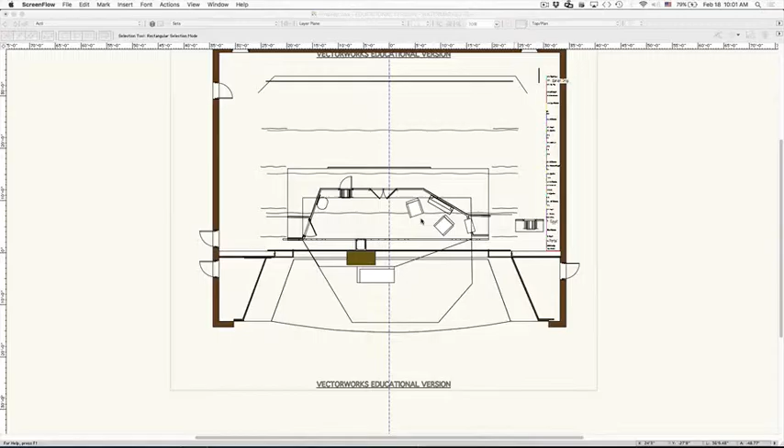Okay, today in Vectorworks, we are looking at lighting positions, object info, and some printing stuff that you'll need to know to do Vectorworks assignment 2. So here is our Mystery of Irma Vep set. This is the Act 1 set, if you remember from last time. We have our navigation palette, and you can see Act 1, we can see Act 2, remembering that Act 1 and 3 are basically the same, so there's not a second thing.

The other thing to remember is that when we're drawing in Vectorworks, we draw on wherever the check mark is. So I'm going to go ahead and actually activate Act 1, because we're going to start looking at lighting positions. Oh, you're in wireframe. You just go up to here, go to top plan, or I think Control 5 on a PC or Command 5 on a Mac. Okay.

And we need to look at lighting positions. On the file you have, lighting positions are called electrics, because that's what I named them. I didn't name them lighting positions. I named them the electrics because I was the scenic designer. Okay. So you go, where are the electrics? Well, we can come down here under class names and go, oh, look, here's electrics. And they're turned off. Let's turn them on so we can see where they are.

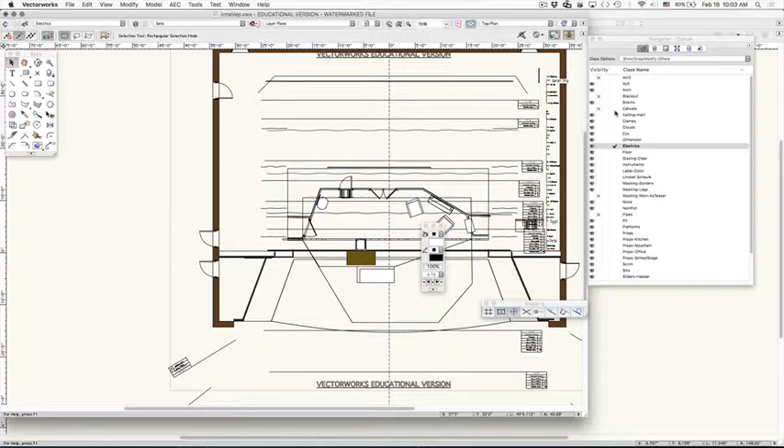Okay. I'm actually going to go ahead and move my check mark to here. And to make this a little easier as you're looking at things, at the moment, I'm going to set this to gray others, which means everything but my electrics are going to be in gray. You don't have to do that. I'm doing that for the video so it's a little easier to see things, okay? And this looks like they have instruments on them. Oh, I know what's going on. I'll show you that. Okay.

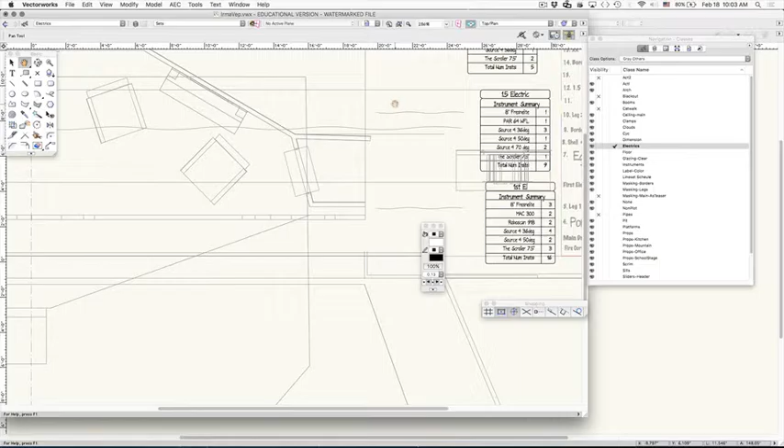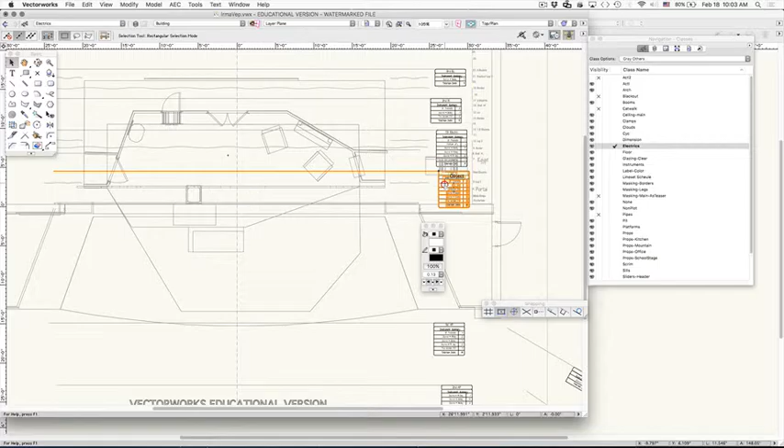So we're going to try to find out about an electric. I'm going to select an electric, okay? Oh, electrics are on the building layer, so you'll have to also move to the building layer to select an electric. There we go. Okay, I've selected this electric. We'll zoom in on here, it says it's the first electric. Okay, I want to find out about this electric. I want to get some information.

To do that, we're going to use the Object Info palette, which we find by going to Window, Palettes, and Object Info. I'm much better with a mouse than my finger. Okay, here we go. And there are three things. There's render, which is how it's being drawn, data, which gives us some information about it, or shape. Shape is actually where we're going to get most of our information at the moment. Okay, so let's look at this. I've selected the first electric, and we can look at this here.

So it is a lighting position object. What that means is I can hang a light on it. That's what you can do with a lighting position object in Vectorworks. You can hang lights on them. The class is electrics. In case I wanted this on a different class for some reason, I could move it by using the drop-down menu here. You can do this with anything. If something's on the wrong class, you can just change it here. Same thing with the layer. I could move that to the scenery layer, the lighting layer, whatever. I'm going to leave it on the building layer for now. But you can move it if you need to.

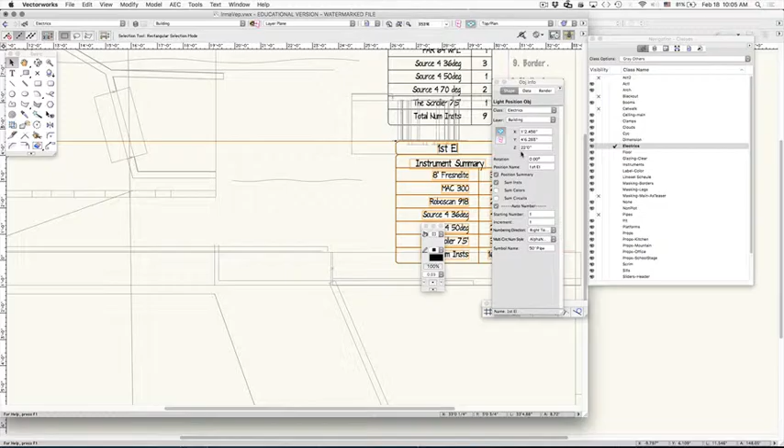Okay. Next up, we have X, Y, Z. X, Y, and Z are coordinate points in space, okay? The one we're going to be most concerned with on our lighting positions is the Z. Z is the height from the stage floor, okay? So our first electric is 22 feet from the stage floor. Does that mean your first electric on your show has to be 22 feet from the stage floor? No, you can set it as the lighting designer in consultation with the scenic designer, and I'm going to be pretty flexible with you.

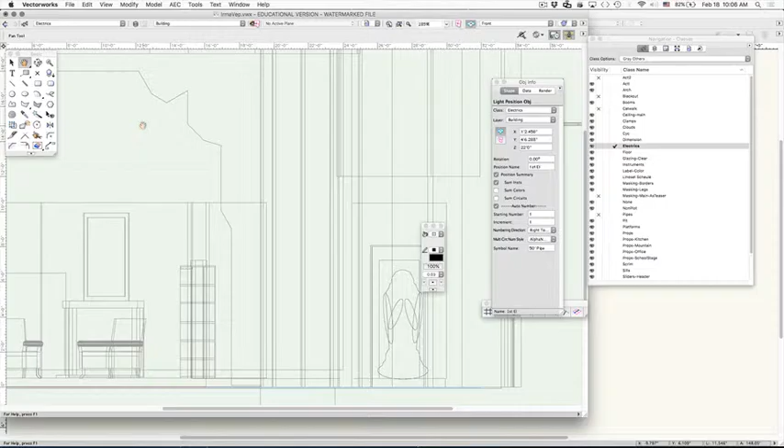Now, I'm going to move into front view for a moment here. Okay. Did you guys see how I did that? There's a little drop down here with your views. The other place you can get that is View, Standard Views, and Front. Okay. And where is my first electric? Okay, I'm going to go into a 3D view. First electric, where are you?

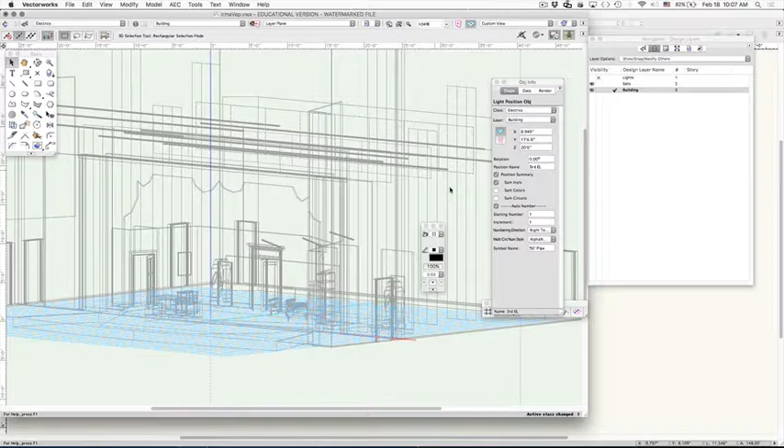Oh, in 12 I can't select an electric in this view. Can I force select it? No. In later versions of Vectorworks, post 2012, you can select an electric in 3D view. Fine. We'll go back to this. And now I've got it selected.

Okay. So it's at 22 feet now. I'm going to go ahead and reset my Z value to 12 feet. So you can see what has happened. We're now going to go back into our front view. And now can you see I now have an electric way down here? Yes. Okay. Oh, and now that it's selected, it looks like I can change it back. Yes. Okay, I can change it back.

Again, you set what your electrics are at. That's your call. Okay? Within reason. A 12-foot electric's probably going to be a little weird because that's going to be in the actors' faces. Okay? But fine. So that's how you can change them. The other thing you can do is, in everything after 2012, you can grab them and move them.

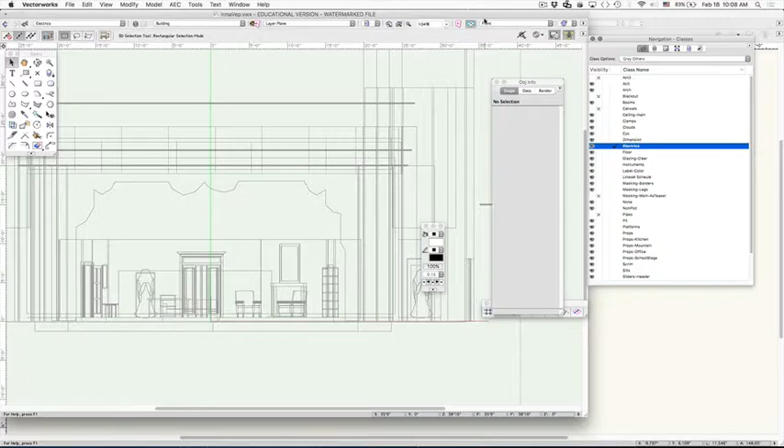No. You weren't able to? Okay. Really? I just tried it because I clicked it to like 1 foot, and I tried to click on it to move it, and it unselected. Okay. So you may have to do electrics. A lot of other things you can move, but it's actually fine, I think, that you can't just randomly grab your electrics and move them, because that really is protecting you, that you're doing this as a deliberate decision about where you want your electrics.

Okay? The electrics that are in here are the pre-built electrics. They're there. If you need an additional electric or something, come talk to me. I will help you build one. We don't really cover a lot on doing that, although if we have time, if we get through everything else, I'll show you guys how to build an electric in Vectorworks.

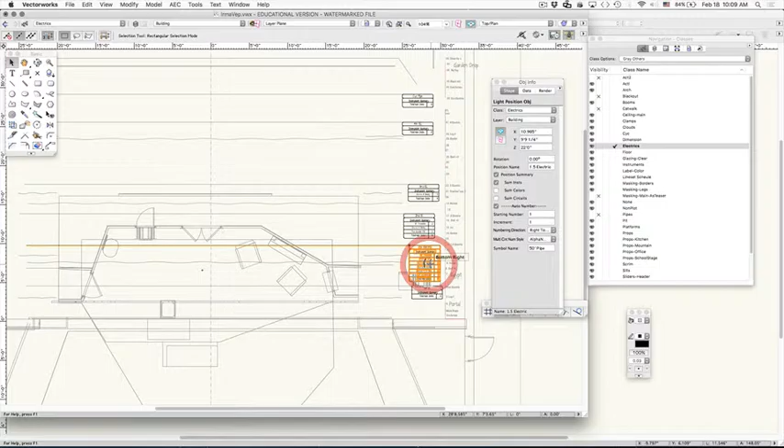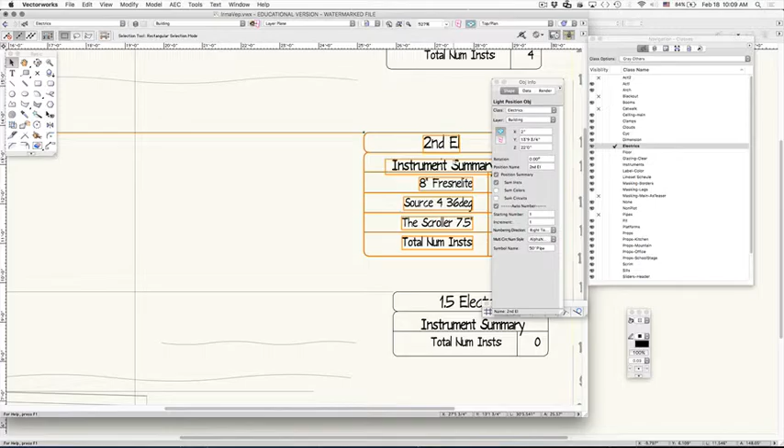Okay. A couple of other things. If you make any adjustments to these, this is a list of all the lights that are hanging on it. However, I apparently didn't have it reset before I did that. So if it bugs you that this says we've got all these lights on here and you're like, we don't have those lights, select it, click on position summary, turn it off, turn it back on, and then it will reset it. Does that make sense?

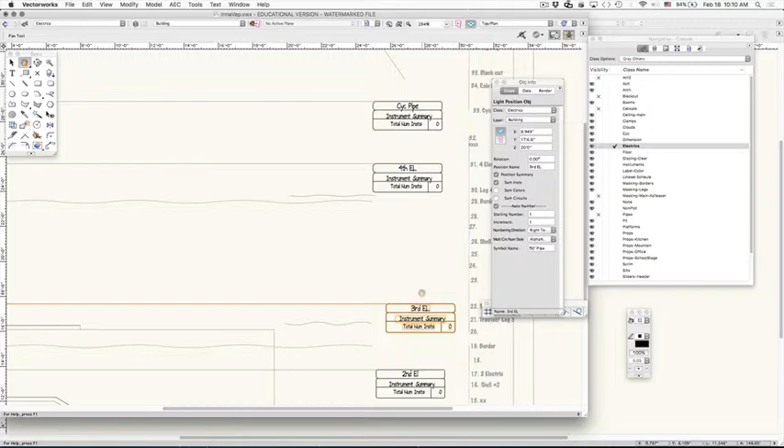Vectorworks, a lot of this stuff where it's getting data and filling in stuff for you, it does not update live because it would crash your computer with all the things it has to update. So if you want something updated, you usually have to run an update. And again, it's as easy as turning on and off. And now it's updated. Okay.

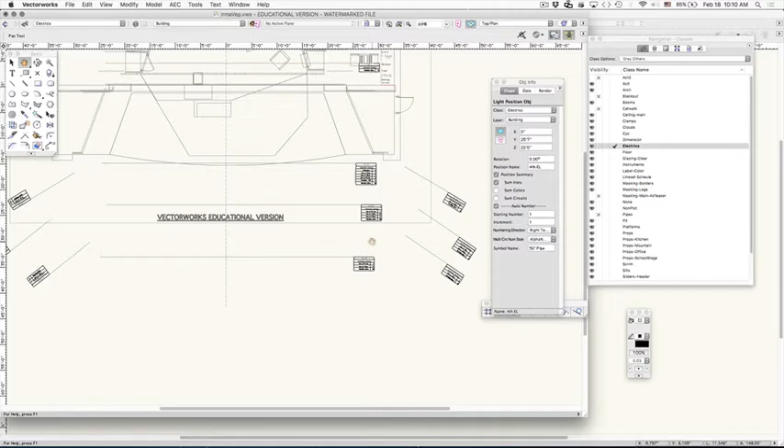We also have front of house positions. They're called the first AP, second AP, and third AP in our theater. We also have box booms. Now, box booms are vertical positions, okay? On a drawing, you really couldn't see them because they would just be little dots, right? What designers do to symbolize them is they call it an exploded view. They basically take it from where it was, like a tree going timber, and they tilt it outwards.

So this would be the bottom of the box boom, and the bottom of the box boom is where the box boom is in reality. And then here is the top of the box boom. It's outside. Vectorworks does not actually understand that's what you're doing. So when you're using Vectorworks to do the math for you on your box booms, they're going to be a little bit off.

So basically you just have to assume that if you're at the bottom of the box boom, your light is going to be a little bit smaller in beam and a little brighter than you thought it was going to be. If it's at the top, it's going to be a little bit bigger and a little bit dimmer, but it's pretty close.

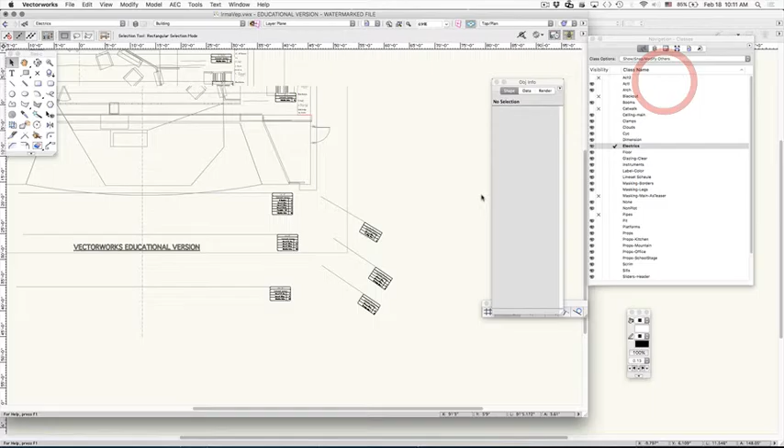And I have the height of the box boom light set to where the middle of the box boom is, so 15 feet. And that's approximately correct. I mean, you'll notice I have everything in nice, even half feet because that's close enough. And then I'm not stressed about lighting stuff.

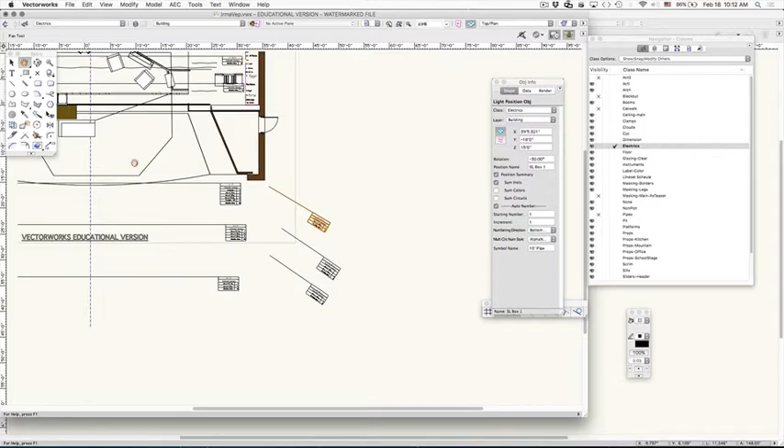Okay? So we've got our box booms, we've got our APs, we've got our overhead electrics that we can move around. Does that make sense? Okay, so for your Vectorworks assignment 2, we're going to talk about instrumentation and photometrics. You need to print out your set, Act 1 and Act 2, and your lighting positions. So we need to talk about how we do that, okay?

Okay, so come on, redraw. There we go. You guys see this gray box here? This is our piece of paper, okay? To move our piece of paper, it is the page move tool, which is hiding under our pan tool. So click and hold pan. Now you see we have a little pop-up menu and we go to page move tool. Page move tool allows us to move the paper around, okay? Ooh, exciting.

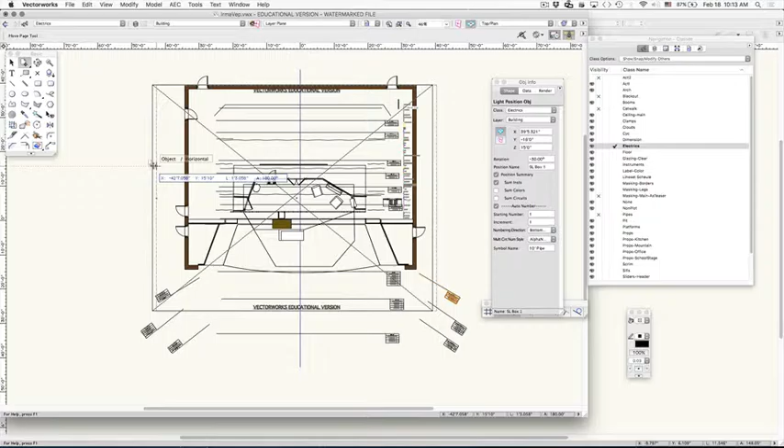Is this paper big enough for me to get my whole drawing on? No. So I need to make the paper bigger. That's actually not going to help unless your printer can do different sizes of paper. But we're going to go down here to our page setup. And we're going to choose a paper size. Actually, just choose a paper size, and go to printer setup.

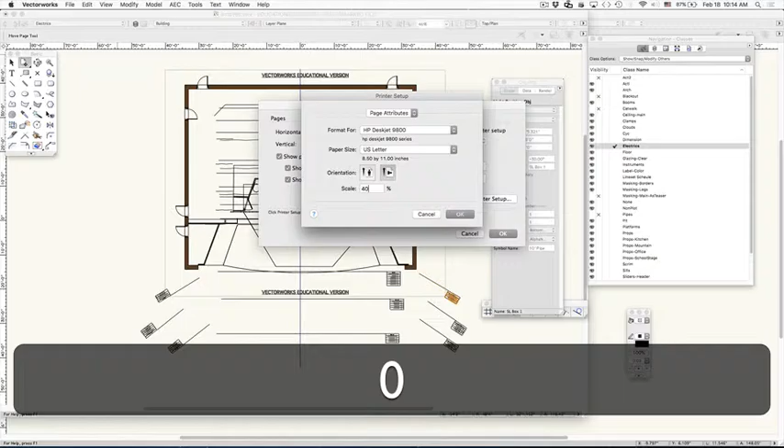So here's where you're going to select the size paper you're going to use. If you're in the Idea Lab or you've had just a regular printer, you're selecting US letter. That's 8.5 by 11. That's your standard piece of paper. But what you can do in Vectorworks is say, yeah, I get that I'm just using an 8.5 by 11 piece of paper, but I need to get more set on here. So I don't care that it's no longer in scale. I'm going to set my scale to 40%. And I click OK, and now my piece of paper is big enough to get everything on it. 40% is about the right answer, okay?

Or the other thing you could do is set it back and print out multiple pieces of paper and tape them together. But it's only going to print out what's inside the box. Does that make sense? Inside the box is what we do for our paper. Okay, and then you guys know how to print from there. File, print. Okay? Oh, goody. We have got lots of time. I covered everything. Lighting positions, we looked at those. Object info. Printing. Okay, so let's make a lighting position.

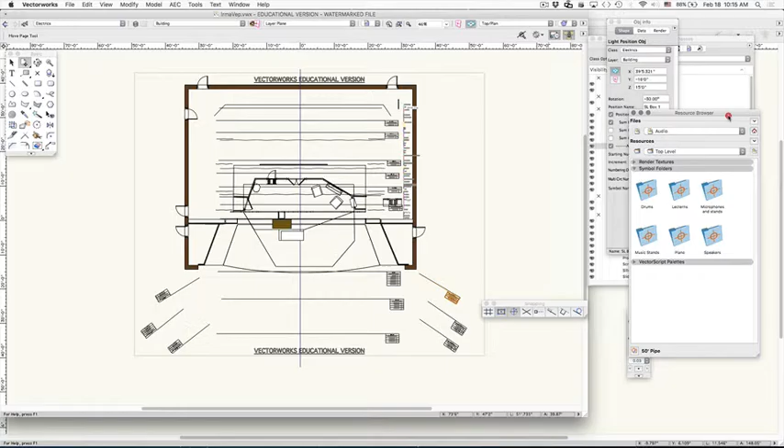To make a lighting position, you have to have something in the drawing already. It has to be a hybrid object, which, yeah, I'm going to show you how we do this the easy way. If you go Window, Palettes, Resource Browser, you're going to get all these symbols that are in the drawing already. And apparently some that are left over from something else. We're going to go up to Irma Vep because that's the name of our drawing, okay?

And we have a desk in there, and we have a 4-foot ET canopy. I have no idea what that is. Oh, it's a plant. Anyway, you're going to see in here there's something called a 10-foot pipe and a 50-foot pipe. And those are the only pipes that are in here. So 10-foot pipe is a type of object. You see how it says it's a 2D/3D object. Something that's a 2D/3D object can be turned into a lighting position.

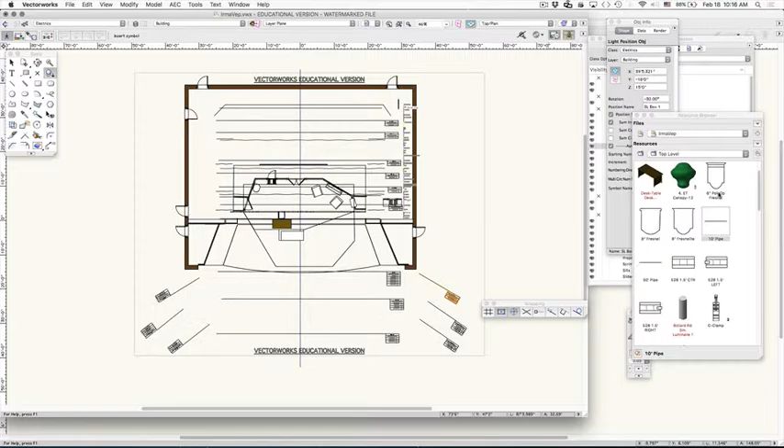Which means in theory I can turn a 6-inch Fresnel, which is a light, which is a 2D/3D symbol, into a lighting position. Don't do that, because it'll cease being a light. And that will be bad. Yes, James. This is Window, Palettes, Resource Browser. Oh, when you go into your resource browser, scroll up to Irma Vep where it says files. Oh, make it bigger. Drag the corner, make it bigger. Okay.

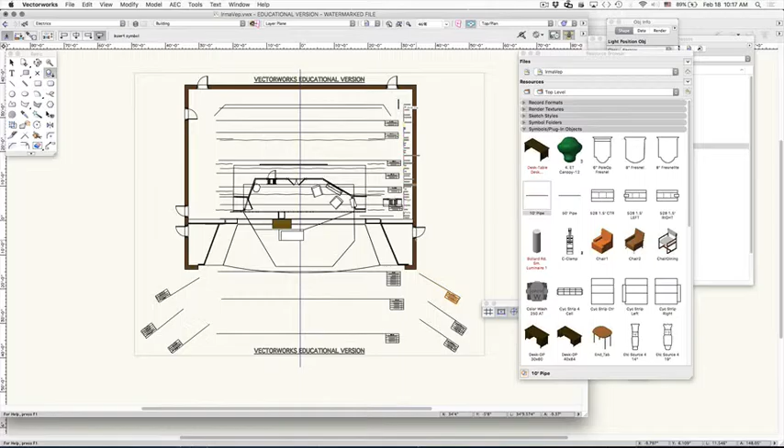So I'm going to go for a 10-foot pipe. 10-foot pipe will be a lighting position that is 10 feet long. Select it. When you double click on it, you're going to automatically select the symbol insertion tool, which is over here. Now I'm going to click here where I want this, and I can always move it later. First click places the middle of it. Second click sets the rotation. Okay, and now I have that in there.

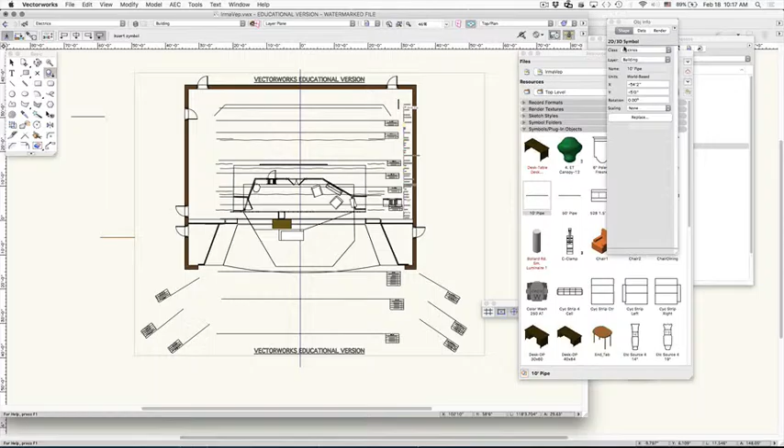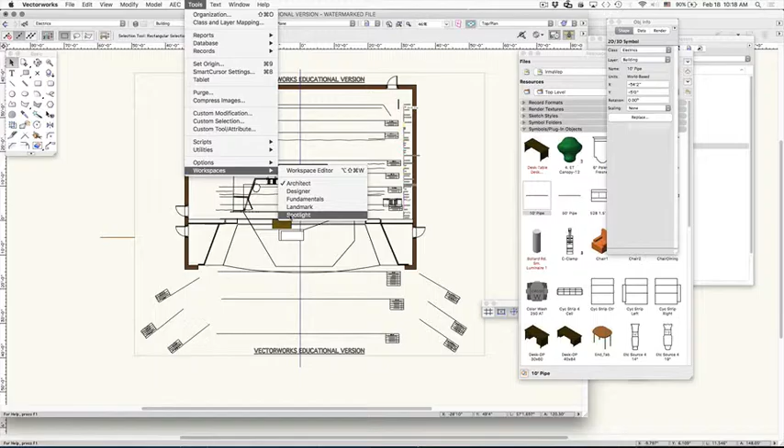Is it a lighting position yet? No, it's a 10-foot pipe. And we know that because we go to Object Info, and Object Info says it is a 2D/3D symbol. That's all it is. It's a symbol. I'm going to select it, and hopefully you're already in this mode, but you may not be. Go to Tools, Workspaces, and make sure you're in Spotlight. If you're not in Spotlight, just change it over. You're going to see your drawing will redraw for a second. Everything should come back. And if it closed all your palettes, just reopen them.

Object Info. Actually, I don't need my resource browser anymore. But I do need my navigation. Okay, so I have my object selected. It's a 2D/3D symbol. I now have a Spotlight menu up here since I've selected Spotlight. Everyone see that? We're going to go down to Object Conversion, Convert to Lighting Position. If you are on 2015 or later, I think it's just straight under Spotlight. Is it still under Object Conversion? Okay.

There is actually a slightly easier way to do this in the newer versions, but I'm teaching everyone, and this way still works, and it's the way I always do it. I put my light in and then make it a lighting position. In the newer versions of Vectorworks, when you select an object, you can select a command for lighting position and put it in, saving a step. But I don't really think it saves much. I think it's the same number of clicks. So, convert to lighting position.

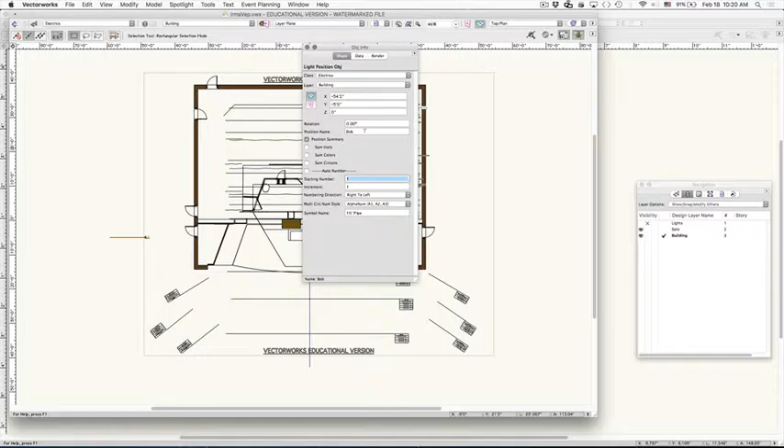Position name is in here, temp SR1. If you say, wow, that was a really bad name for the position, I really want to name it Bob, I have just renamed it Bob. Officially, going to make lighting positions use people's names - that's how it's going to be now.

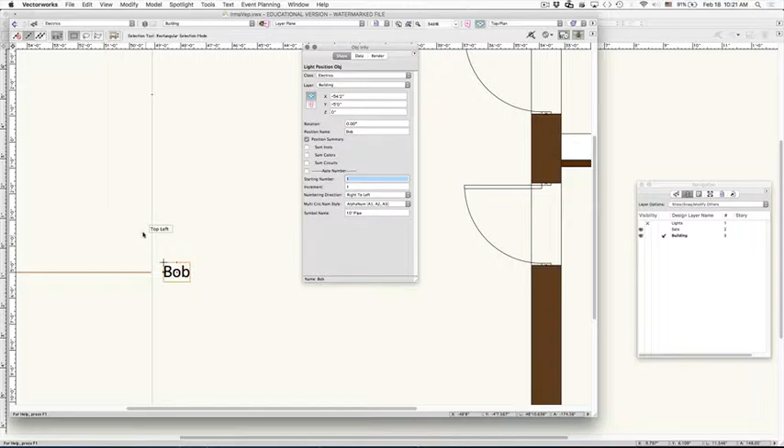It was a tradition in my undergrad that if you were adding temporary positions, they were typically named Fred, Ethel, Lucy, and Ricky - if any of you recognize the reference, it's from the old I Love Lucy show. It was just a tradition; I don't know where it started or why it ended. I understand Disney's extra positions are traditionally named Alice, Baloo, Cheshire, Dumbo, Eeyore - I don't know what's beyond that, but they're alphabetical order of Disney names. Our lighting teacher came from Disney, but that's why we called them Fred, Ethel, Lucy, and Ricky, because she was adapting that system.

Anyway, so we have a position named Bob, and it actually has a name next to it - it says Bob. If you don't want its name next to it, you can turn off position summary and his name goes away. He's named Bob, so he's now a he. We'll do another one, we'll call her Jenny or something. You can have a guy named Jenny, you can have a girl named Bob. So we have our lighting position named Bob.

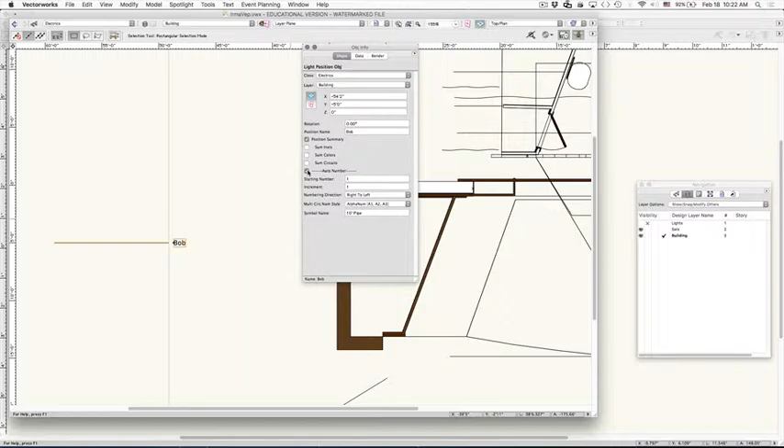There are these other things by it. I'm going to suggest that you turn on auto numbering - auto numbering is going to save you a step later. It's just below position summary. Oh, there it is. When you select auto numbering, you need to select the auto numbering direction, and I need to talk about this for just a moment. Bottom to top...

Remember, Vectorworks does not understand booms, that they're laid out sideways. There is a way to sort of make Vectorworks understand them in later versions, but it doesn't do a good job, so Vectorworks hates that I say that. Bottom to top does not mean referring to the boom, it means from the bottom of the piece of paper to the top of the piece of paper. Left to right means from the left of the piece of paper to the right of the piece of paper. It does not understand the theater at all. So just be aware when you're selecting your auto number order how you want it to number them, and we'll get to that later.

And you can always change it - you can turn auto numbering on later, you can turn it off later. That's what I love about Vectorworks, you're not committed, you can change your mind, unless you use polylines, in which case you're just doomed. So, numbering direction, I'll just go left to right.

If for whatever reason you need your auto numbering to not start at 1, you can change that in here. Starting number 2, 3, 4, 5, 6. I'm letting you know that.

File that in the back of your brain. I think I've needed to use that command twice in my life. In 12 years of designing in Vectorworks, I've needed that command twice. It's nice to know it's there, I just haven't needed it very often. Increment auto numbering will number things 1, 2, 3, 4, 5, 6. If you have it set to 1. If you have it set to 2, it'll number them 2, 4, 6, 8, 10. If you have it set to 3, it'll be 3, 6, 9, 12, 15.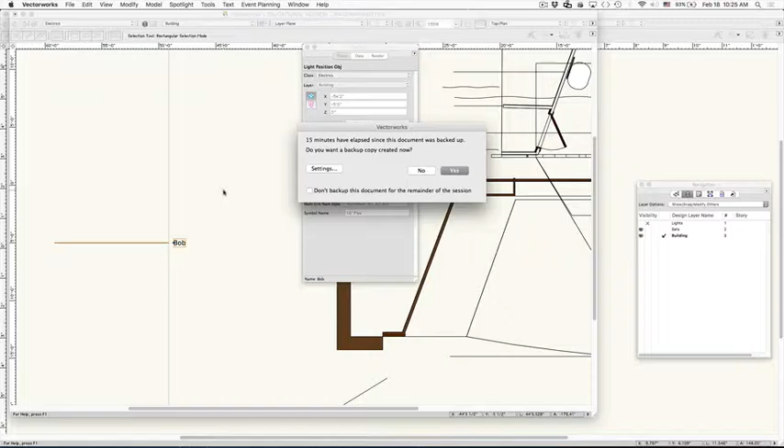Yes. Lighting positions will allow you to auto number. Lighting positions will do paperwork for you. There's a lot of advantages to something being a lighting position. It's awesome, okay? There are times when I create a lighting position called floor so that I can have lights on the floor and have it do all the work for me. And then sometimes I'm like, it's not worth it, and I will just do the work on those myself. Okay?

Lighting position Bob is at 0 feet off the ground. If it's a 10-foot position and it's going to be sitting on the floor, it's probably going to actually be 5 feet off the ground because it's 10 feet upwards. So I like to set that so my math works out well at 5 feet. Okay? And as I move it around...

So I move it around. Come on, Bob, move. Let's move. Okay, you can see that its X and Y stuff changes. Come on. You can see because that's where its insert position is. Okay, and I can rotate it if I want to.

I can either do that with the rotation tool, Window, Palettes, Basic Tools, Rotate. We've looked at the rotate tool before. The cool thing is - I hope this started in version 12 - yes, Bob will always be right side up. No matter how you rotate it, Bob's name will never be upside down.

Okay? It's a good thing because it always prints out nicely. You don't want your text upside down on a drawing - that just confuses people. Okay?

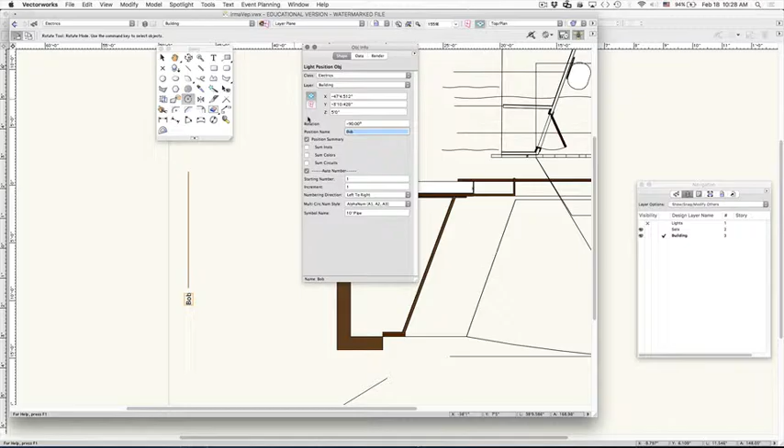But you need a printout of the theater and the lighting positions that you know about. And you're going to obviously need two of them because you're going to need one for Act 1 and one for Act 2. Okay? That's it.

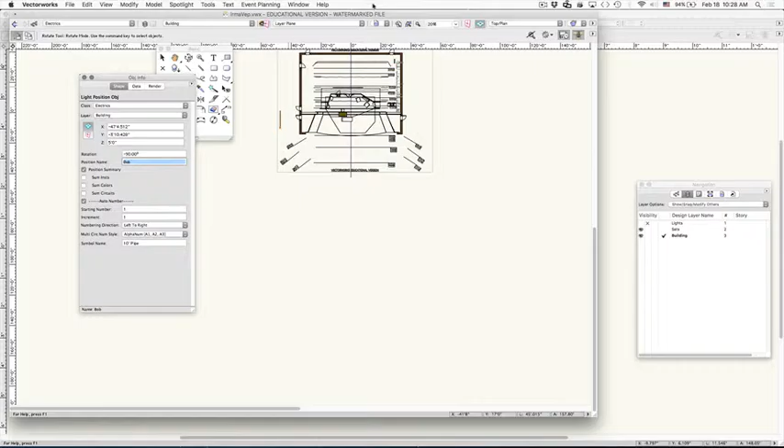If you want to go a little bit farther, you might also want to print out a front view, including the lighting positions. So how would you do that? Well, you would go View, Standard Views, Front. Okay?

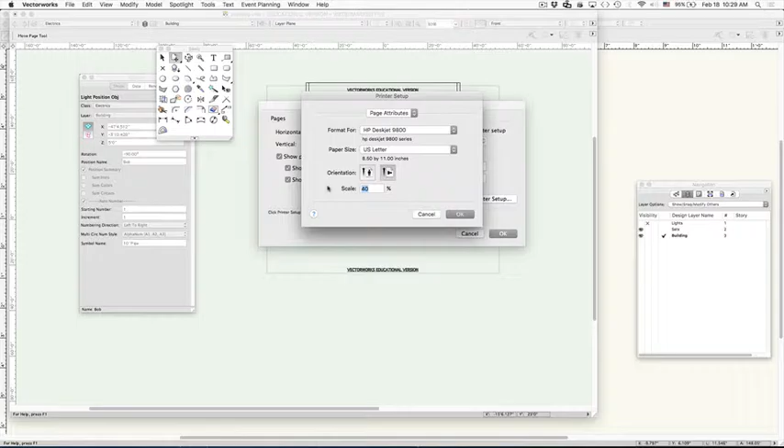And, I'm sorry - when here, zoom in, okay? So here's how high my lighting positions are. We look at this, my page is really big, right? I'm getting a lot of extra stuff, a lot of empty space here. You could go back over to your page setup and say 40%, I'd probably, maybe 60%. I'm just going to guess on that, I don't know. 60%, it's a little small.

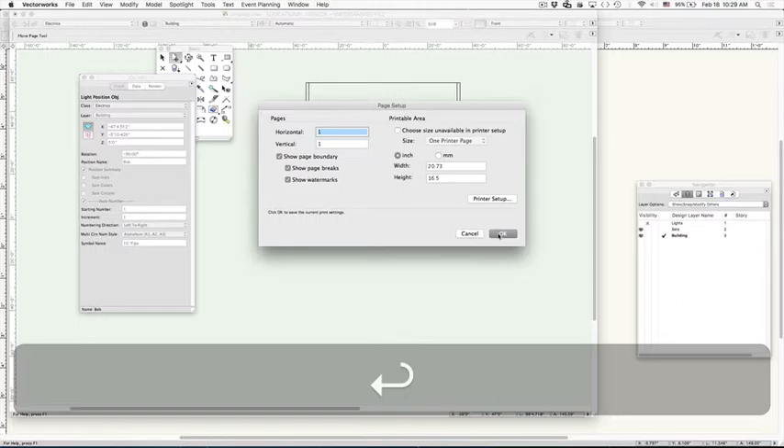Page setup, page setup. At 50%, okay. I'm not quite getting all of my box booms, but it's probably okay because my box booms don't actually fan out like that. They're straight up and down, remember?

So I can do a front view, and you might want to do a side view as well. Same thing, just go to side, which will be left or right, whichever you want to do. And now you can see, oh look, here's Bob hanging off to the side, here's our lighting positions, here's our stuff. That would be an excellent additional thing to do.

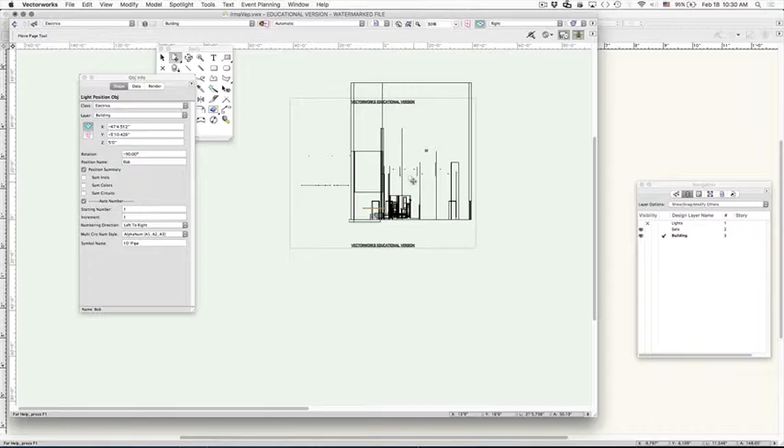Yep, I'm getting everything. We'll zoom in here so you can see we're getting all three of our lighting positions, front of house, and our box booms and stuff.

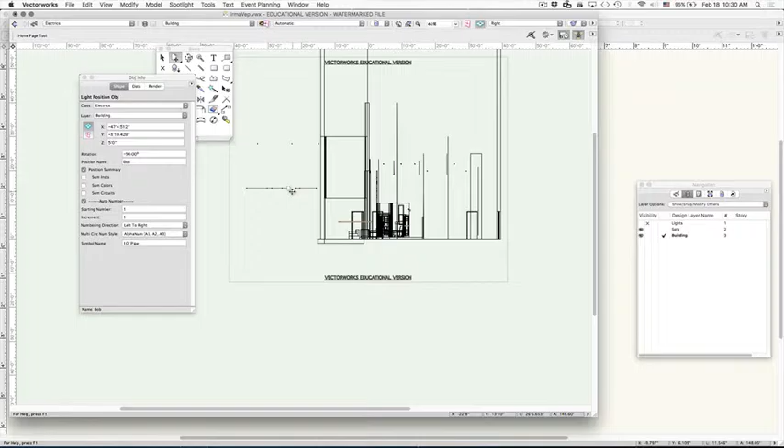Those would be not bad things to have printed out with you, again both for Act 1 and Act 2, for the day Vectorworks Assignment 2 is done. What is required are your top views, your top plan views. Does that make sense? But these other two might help you with your in-class assignment that day. So, hint hint, just saying.

Okay, are there any other questions? Anything else you guys have been playing around with in Vectorworks that you're like going, ooh, I want to know how to do that? Okay, not yet. Did I show you guys how to look at things in color?

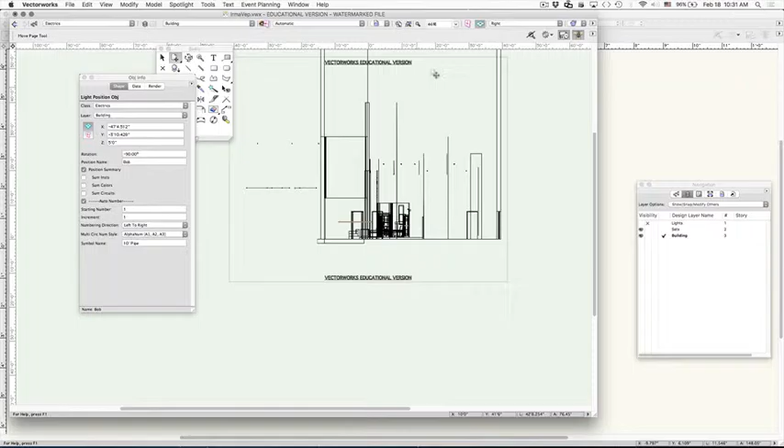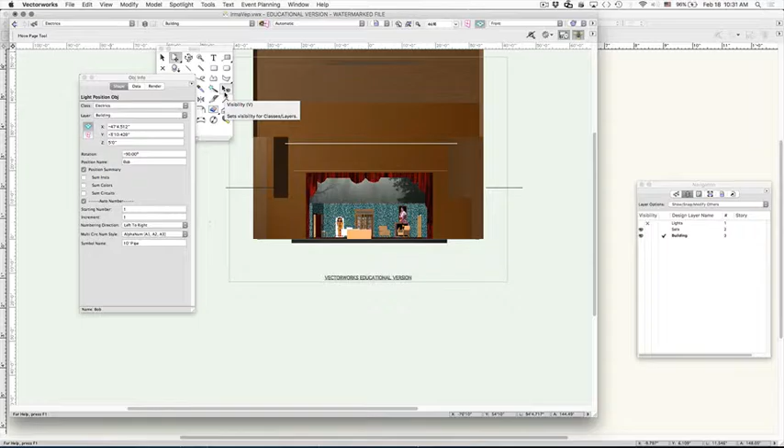You go to front view, or top, or any view. You can go view, rendering, and select OpenGL or Fast RenderWorks would be your best bets because they're the fastest. And you can see what your set looks like in color. You can go, ooh, ah.

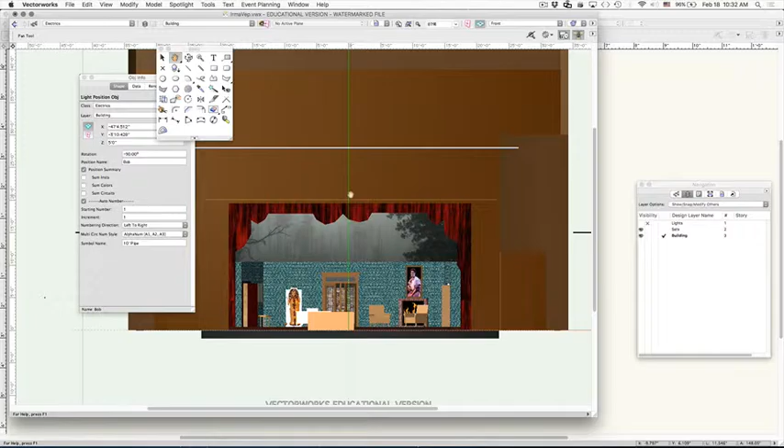It's all pixelated? What do you mean it's all pixelated? It's rendering, give it a moment. Is the white the pipes? Yes, our electrics happen to be white because I never colored them in. So if we move around in 3D here, you will see our electrics. Awesome, awesome. I want to warn you, some of your computers may not be able to handle this, moving around in 3D and in color.

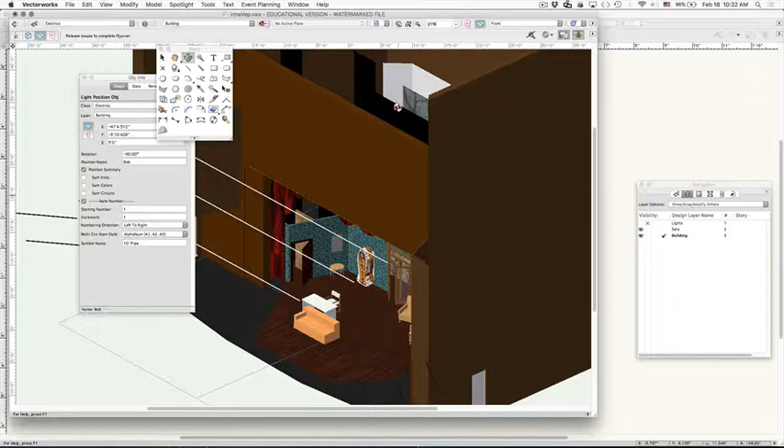Oh no, yeah, I was on it the other day. I was moving around, my computer was like nope, and kicked me out. And I was like, all right cool. Do that again. I recommend if you're going to be moving around in 3D, go back to a wireframe view, rendering wireframe, or Shift Command W on a Mac, and I don't know what it is on a PC. Probably Shift Control W.

When you add lights, does it color the set? Only if you turn the light on. I don't know if it actually shows what it'll actually look like. If you put in a gel number that it knows, and you turn the light on, it will demonstrate it. You can shutter it and focus it, and put gobos in, although the gobos it knows, it doesn't know all the gobos. It's really good, it's getting really good at knowing the light colors. Not as good at knowing the gobos.

Is there like a list somewhere of the colors it does know? I've never found a list of what it does know and what it doesn't. And when we get to doing renderings, I will show you how to, if it doesn't know your gel color, you can tell it. But that's not until way at the end of the semester. Notice I'm not teaching you how to put lights in yet.

Soon, I think that's our next Vectorworks lesson. Yes, March 10th, you'll learn how to put lights in. Yay. But I'm trying not to teach you too much all at once, okay? And we can also look at, okay...

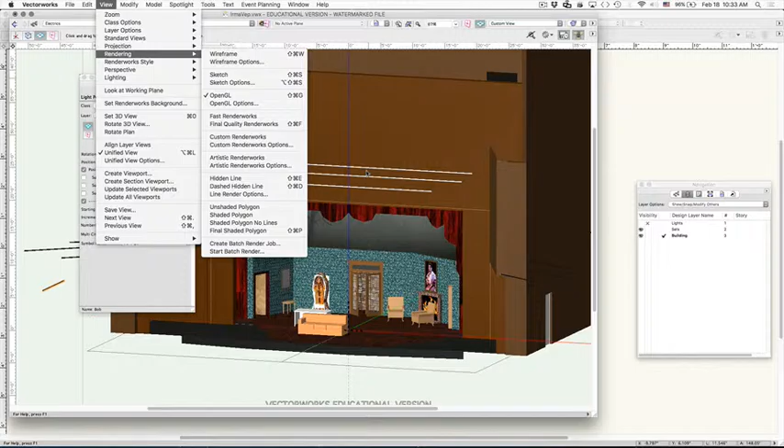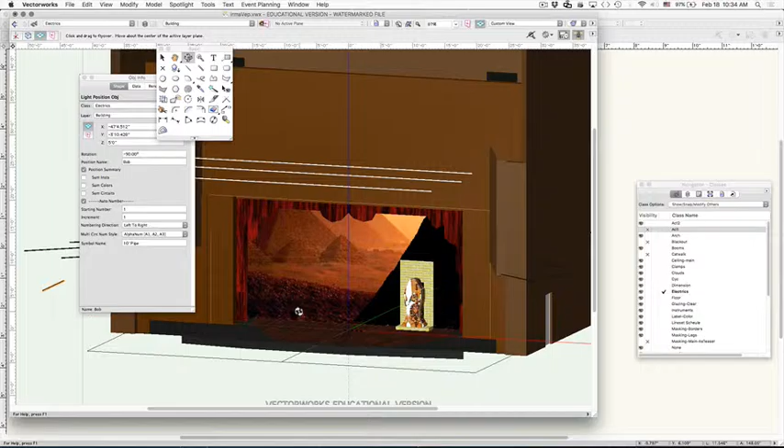Let me turn Act 1 off before I turn Act 2 on. And there's Act 2, and I just want to explain how the scenic designer envisions Act 2 working. All the stuff in Act 2 that's outdoors in Egypt happens stage right. All the stuff that happens inside the tomb happens stage left. And if you look at the backdrop, it's basically black over here, like the side of a pyramid. And then the mummy unit rolls out in front of it.

And the mummy looks all weirded out. It used to look really good. The one in Act 1 is better, is better? It's just tiled wrong. Yeah, it's a tiling error.

For those of you that know what tiling is, it's something that every time I change versions of Vectorworks, it kind of gets screwed up, and I've stopped caring. I'm like, you guys know it's a sarcophagus, everyone knows it's a sarcophagus. We're good. Okay, any other questions? Okay, we're done early today then.